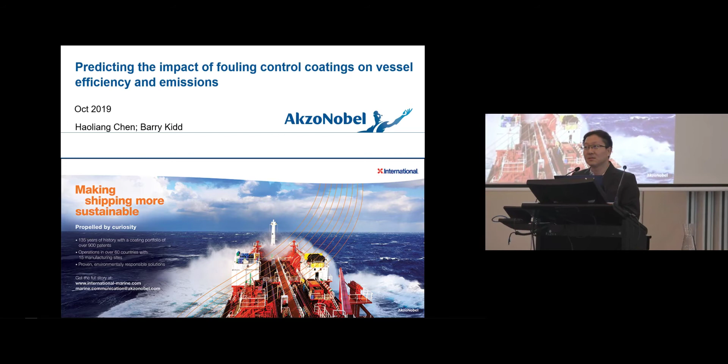I'm talking about the IMO sulfur limit, which will be implemented in less than 3 months. It will start from the 1st of January 2020.

To comply with this regulation, there are two options: either you choose to burn the low sulfur fuel, or you choose to install the scrubber. Neither of them is cheap. Very sensitive, okay - more expensive than me.

Neither of them is cheap, because whatever the initial investment or the long-term operational cost, it will be millions of dollars for an individual vessel. This will urge the ship owner to pursue opportunities to improve their ship efficiency.

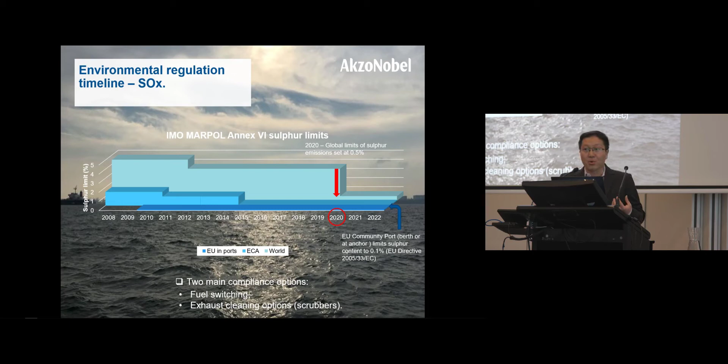So from the engineering point of view, it will make sense for us to look holistically at what will be the potential benefits of different strategies that can be employed to improve vessel efficiency.

Here we take an example recommended by DNV GL. They are talking about improving the bulbous bow, improving main engine or auxiliary engine efficiency, propeller modification, or installing energy saving devices.

Depending on the vessel age and the original design of ship efficiency, and all the changes in coming ship operation - like now more and more ships reduce their speed - there could be good reason, a business case, to review some or all of these options.

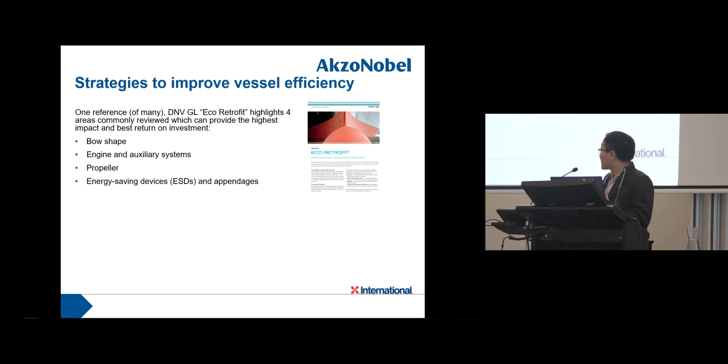But there are other options which have now become popular words in the industry. One is air lubrication, and another is Flettner rotor, which means using the wind to power the ship. Of course, all of these options are valid and may provide benefit in terms of expected efficiency improvement.

However, we cannot overlook or underestimate some other factors - I will explain what we mean - otherwise these factors will negate the potential expected benefit from this improvement.

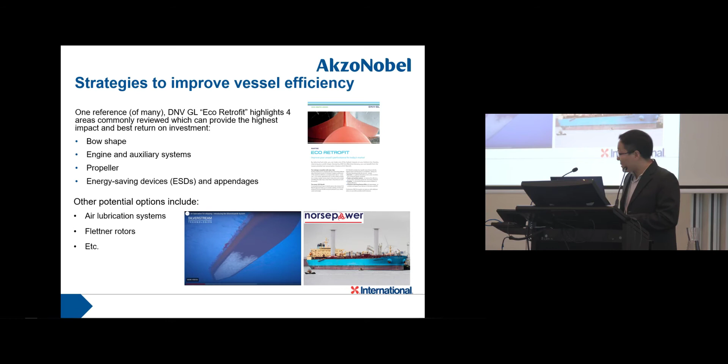So take one step back. We look at some fundamentals. The major resistance when a ship is operated at sea includes frictional resistance and wave-making resistance. The relative importance of these two forces depends on several key factors, like hull form design, ship size, ship type, vessel speed, and hull and propeller condition.

When we talk about ship efficiency, fundamentally we are looking at the delivered power and speed relationship. In fact, for one particular ship, once it is built or out of the dock, the ideal speed and power relationship is fixed.

It's just that over time, as all vessel ship owners know, the speed-power curve will degrade because of change in the hull and propeller condition over time - whatever is the hull damage during port calls, or because of accumulation of biofouling on the surface.

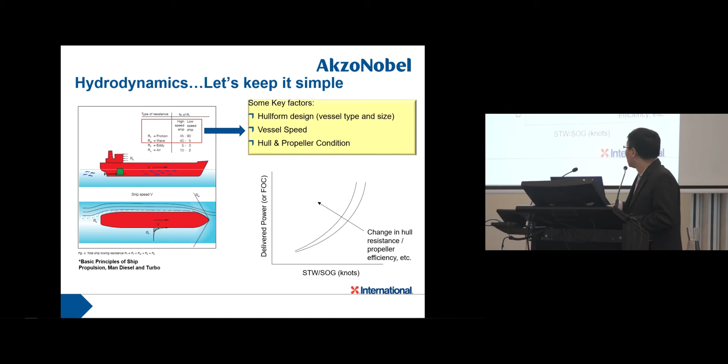Over time, from an engineering point of view, when we talk about ship efficiency and efficiency drop, it basically means to maintain the same speed, we need more power. Or alternatively, if we constantly output the same power, the speed will drop. This causes speed loss. So this is basically what we are talking about regarding ship efficiency.

The important thing is when the operator is planning for the future, how they can position the requirement to manage the condition of the hull and propeller versus other investment decisions, like mentioned in the last slide.

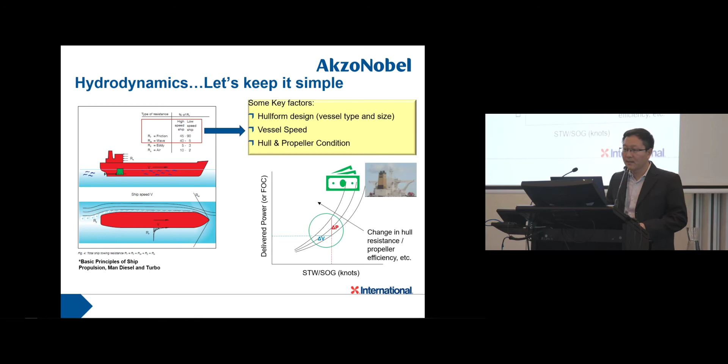Of course, here I'm talking about fouling control. Many vessel operators appreciate the need to control biofouling by application of efficient fouling control coatings, plus hull and propeller cleaning if needed.

The potential range of impact of biofouling growth on vessel efficiency is huge. In general, from soft biofilm to hard barnacle, it will increase the friction resistance. As for the exact number, scientifically we can still debate and need more research to look at this. But in general, this provides some hint of the impact in terms of what we call the power penalty.

On the other hand, we should pay attention to this. It may serve just as a general guidance, because depending on the nature of the biofouling and the extent of fouling growth, this number can significantly change, even for slime and for barnacle. So it doesn't mean a fixed penalty.

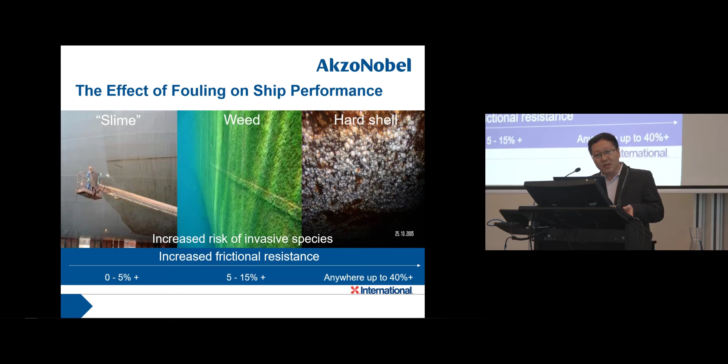At the same time, as easily illustrated in the pictures, from left to right, there's more frictional resistance induced by the fouling growth. It also means increased risk of invasive species.

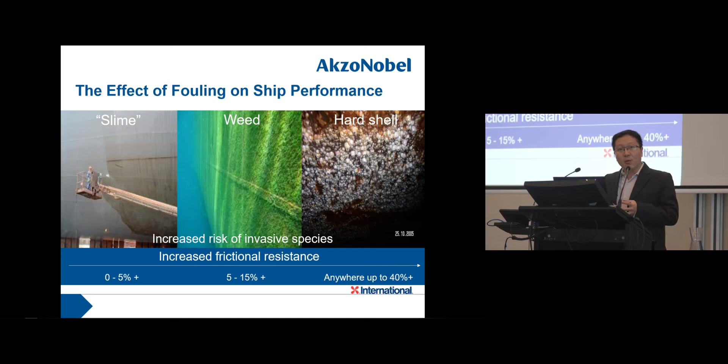So from that perspective, we are consistent in terms of regulation expectation and target, as well as the ship owners' economic incentive. All have the same goal: we want to maintain a smooth and clean hull. The question is, how do we do that?

In AkzoNobel, we definitely need to customize our product offers to our customers to fulfill different needs and consider all these complex factors, as well as the dynamic scenario over this whole time period.

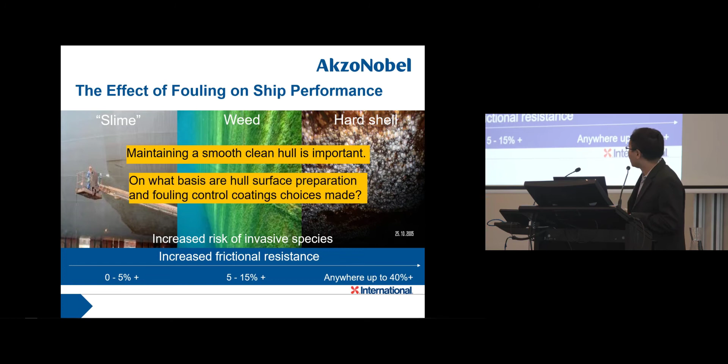So what are the key factors we need to consider when we make the prediction or do the recommendations? These are the list of key factors. In fact, if you recall yesterday's talks about regulation, implementation, and practice, we're basically talking about similar factors, whatever the ship type, size, operational profile, and what coating is used or going to be used.

This means from the regulation body's point of view and from the industrial player's point of view, we have a similar source, and we can achieve a joint goal.

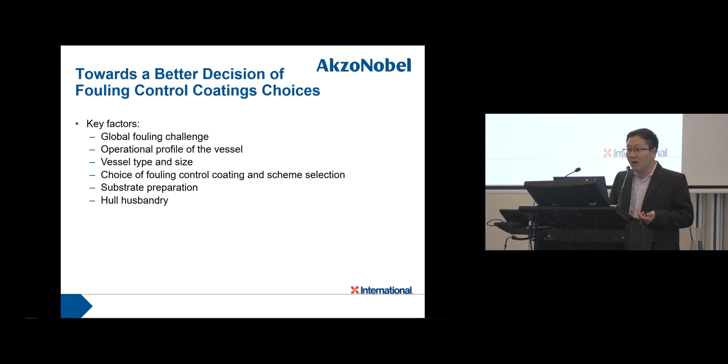One of the challenges in making best use of these factors is whether we have a substantial database. This is always the first step, because without data, we cannot make sound decisions.

Luckily, in AkzoNobel, we have decades of records based on our in-house Dataplan system or event report system. In that system, we record more than 250,000 vessel inspection records over the decades.

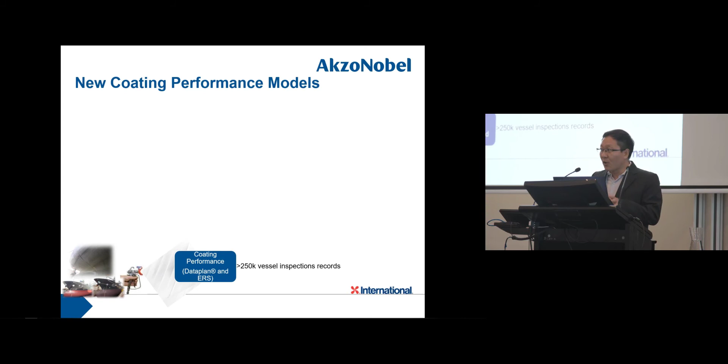At the beginning, we didn't foresee we would have this wonderful use. This database records coating performance in docking and out-docking for hull condition, corrosion, and fouling growth, all together, along with surface preparation information.

With all this information linked with hull surface measurements, done by hundreds of TSRs globally, we can build up the coating performance model, or the hull roughness prediction.

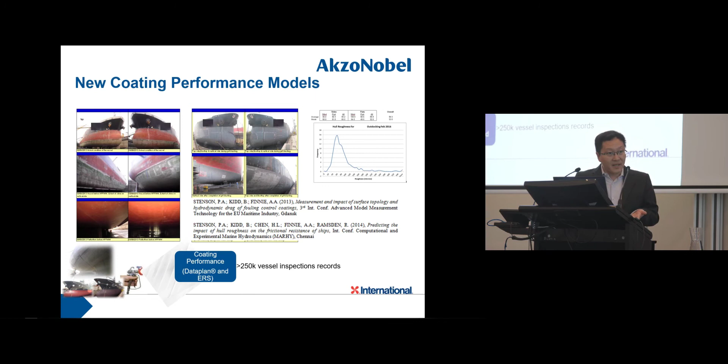At the same time, if we only have this coating performance data, the use is limited if we cannot link it with the operational profile. So we have our in-house tool, called Intertrac, powered by AIS data and the environmental database, which can help us track the ship route, as is now normal. But not only that, we also map it with the fouling challenge.

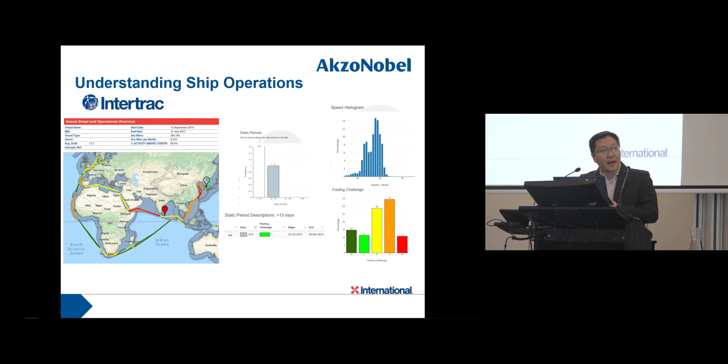For different routes, different seasons, because the ship goes through that particular region and season, they may face different fouling challenges. So we combine them, including the percentage of activity, to come out with a better prediction model of the surface condition, and also convert it based on state-of-the-art research done by our academia colleagues to come out with a prediction model for the hull roughness. Then this hull roughness needs to link with the particular trading route.

Because we have thousands of trading routes and different ships, in order to simplify the work, we group them into aggregated routes. Here we take 9 routes. Of course, it's sometimes a compromise between whether we take more detailed routes or fewer.

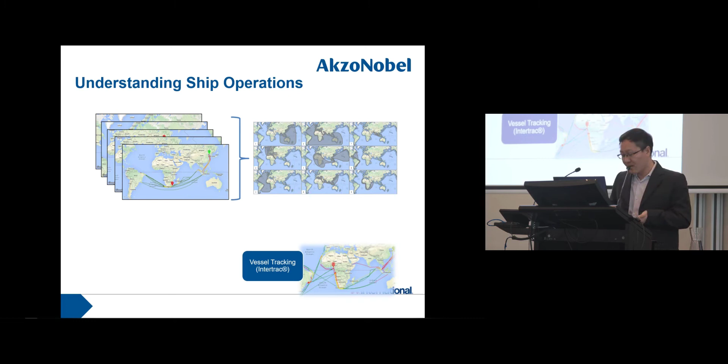The coating performance can be linked with this aggregated trading route, and for some routes it's definitely harder for the coating performance, like coastal warm water, which faces a high challenge. Within this review, we can develop a coating performance model for specific products and specific trading routes, and because we have in-docking, out-docking, and in-service performance data, we can build up the dynamic development curve for fouling growth and how roughness changes.

That's only at the fundamental level. Going forward, moving one level up, for the owner we need to predict the powering and fuel consumption. For this work, based on our prediction of hull roughness, we work with MARIN, one of the famous naval architecture consultants and research institutes in the Netherlands. They help us run the simulation to come out with this.

Confused with the button now.

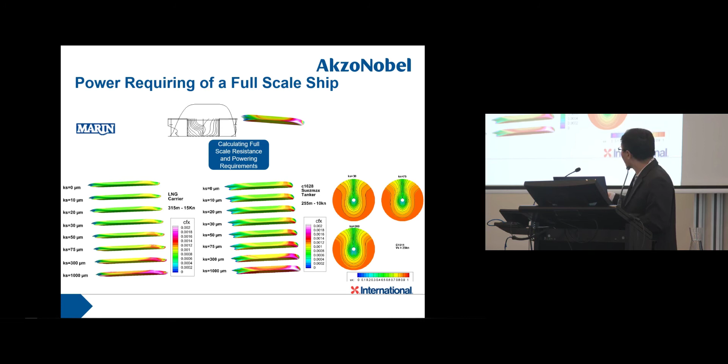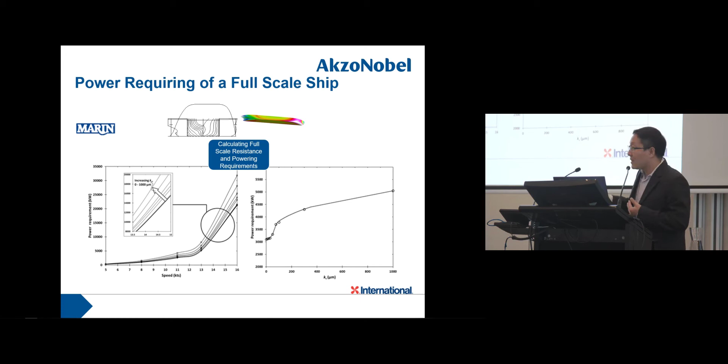They can help us predict the power required for different speeds and different hull roughness levels, which means this will be a unique dynamic condition for this particular scenario. Combined with this, recap the picture: we have the fundamental Intertrac system, performance records, and the link with the full-scale CFD model. We can come out with a prediction tool we call Intertrac Vision.

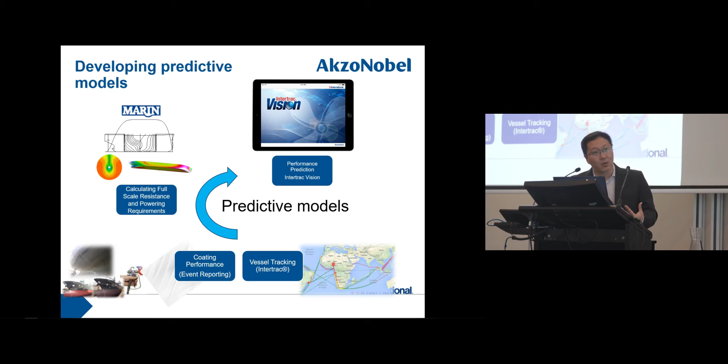This helps us predict the potential benefits for different scenarios and different coating selections. Of course, the natural question is, how do we validate that? So here I take one example: if we take one particular ship, a chemical carrier, this is the ship dimension, and this is the trading route based on customer feedback.

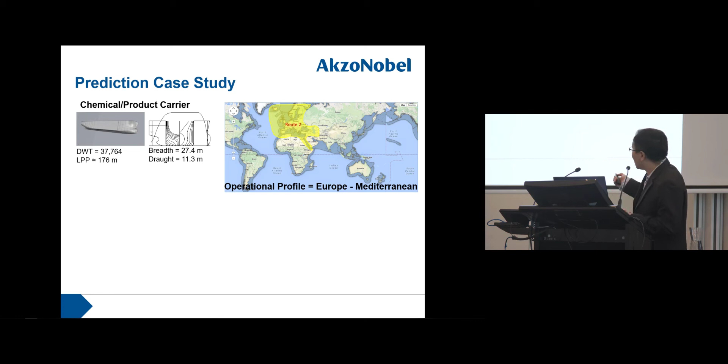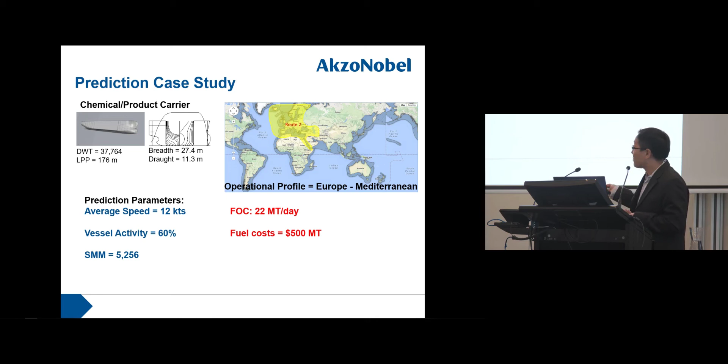This is the expected operational profile, speed and vessel activity, which means the speed is larger than 3 knots most of the time, 60% of the time. The sea miles per month is about 5,000 plus. This is a reference fuel consumption level per day, and also the current fuel cost - current is, I didn't touch.

So this comes out with a prediction for 3 selected products. One is biocide anti-fouling, Ultra Plus Premium. What is the predicted percentage, relative percentage, in terms of over the whole dry-dock cycle?

So link with the speed-power curve. Over time, because there is more fouling accumulation on the hull, to different levels, they will definitely increase the power required. But for different products, they have different performance - that's why, especially towards the end of the dry-dock cycle, the performance is different.

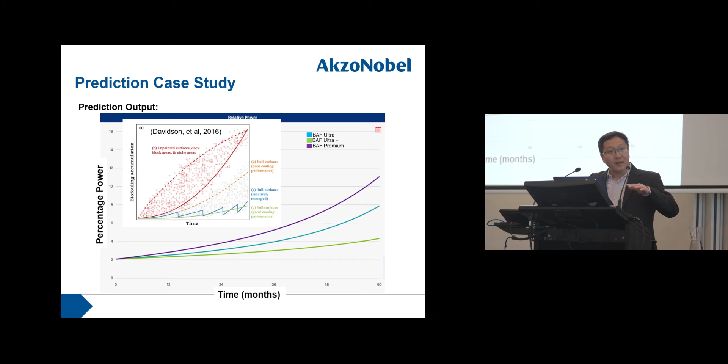In fact, yesterday I just learned from Davidson's presentation - I went back to the hotel and read his paper. It's wonderful, and it goes back similarly to 2016. His paper basically mentioned the good coating performance versus the poor coating performance - this is the difference in performance. In fact, our first version of Intertrac Vision was launched towards the end of 2015. It means, as a community - industry and academia - our understanding of this topic has progressed in parallel, and we can benefit each other.

So come up with the numbers. We can look at the relative benefits for different product selections. If we choose the BAF Premium as a baseline, we can see the BAF Ultra and the Ultra Plus give relative benefits, also environmental benefits in terms of reducing carbon dioxide emissions, because for the Ultra products, you burn less fuel, so you release less carbon dioxide.

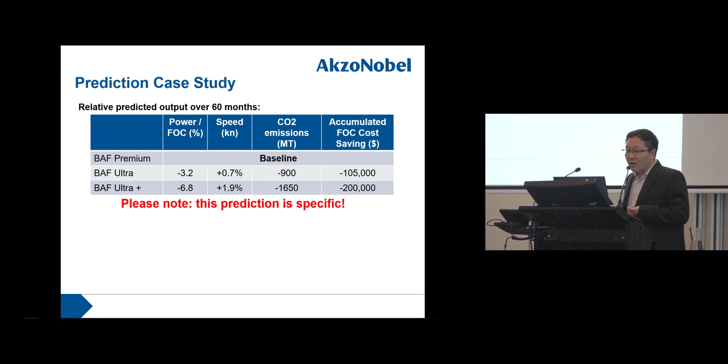Then if we go one step further to look at other options, like during the dry-dock, you can install different energy-saving devices, PBCF or Mewis duct. For each of them individually, in isolation, they can deliver different levels, around 5% of the benefit.

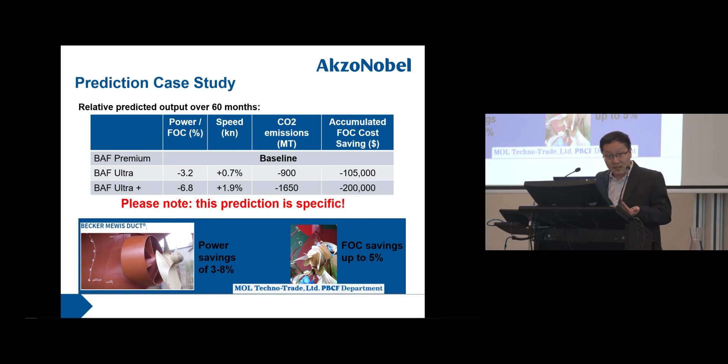However, this is only in isolation. If we look at it as a whole, especially during the dry-dock decision, because of the very tight dry-dock budget, which is the norm in the current shipping industry, if you choose to spend a lot of investment on this part, but at the same time compromise your choice of anti-fouling coatings, going to the lower level, your expected performance delivery may not be achieved. So in that case, we need to balance the dry-dock investment.

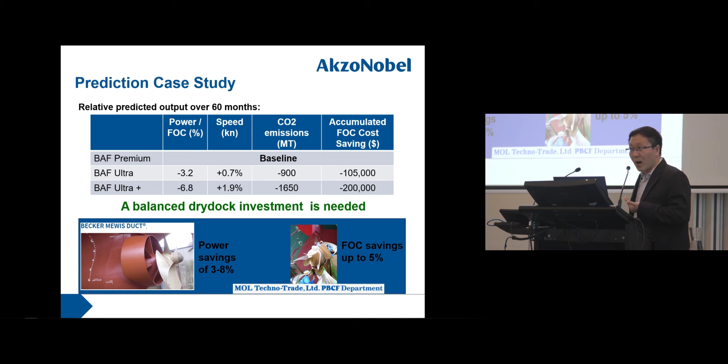At the same time, these energy-saving devices, from the NIS (non-indigenous species) perspective, cannot deliver that benefit. So to fulfill the regulation requirement, they still need to choose better and optimized products to deliver the fouling control requirement. So this is one part.

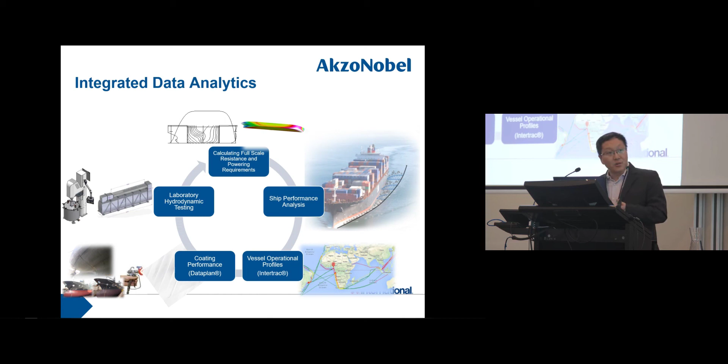And then we come back to the question, how do we validate? Of course, we need real data and real experience to validate our performance prediction. So we choose to do ship performance analysis. This, in fact, is already routine work in AkzoNobel. We put together a holistic picture to assess the prediction against reality, not only vessel performance analysis following the ISO 19030 standard, or using advanced theoretical or empirical formula methods.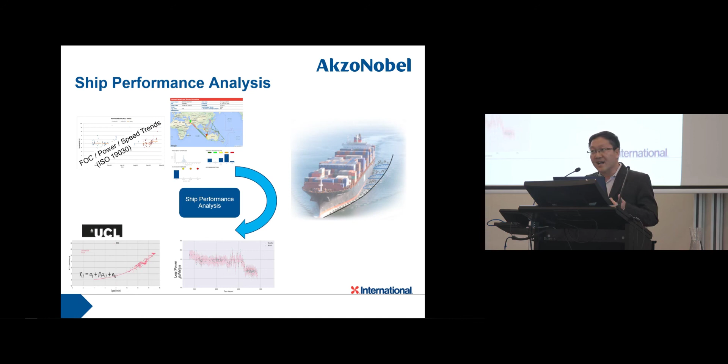We also try to go one step forward. We work with University College London to use machine learning and deep learning to try to do the prediction about upcoming performance, and to help us make preventive actions to meet whatever the economic requirement or even the regulation requirement.

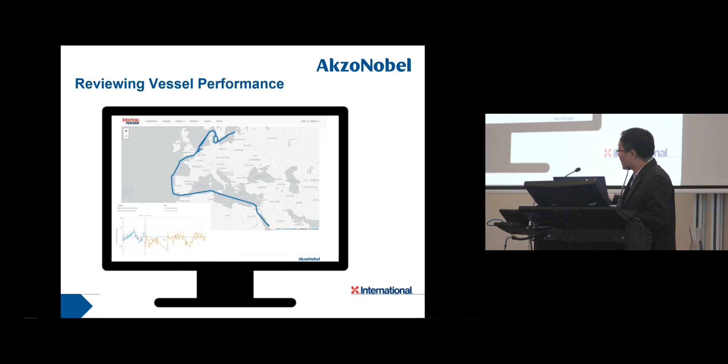So then, of course, to release manpower, since in any business organization it's tight, to reduce our manual workload, we developed this online vessel performance AI tool, powered by UCL's model. It will be ready to connect to the customer in the next 2 months. This will release our time to focus on deeper understanding about hull performance and better tools development.

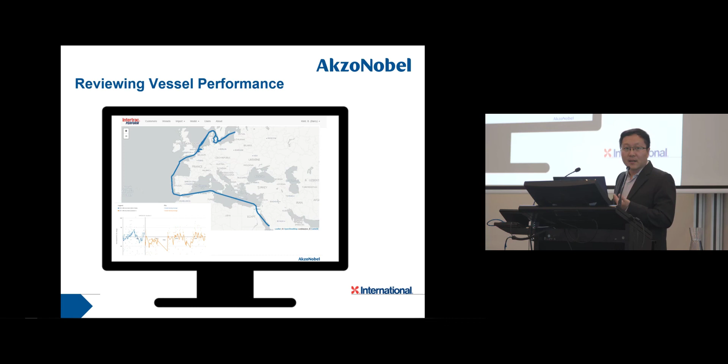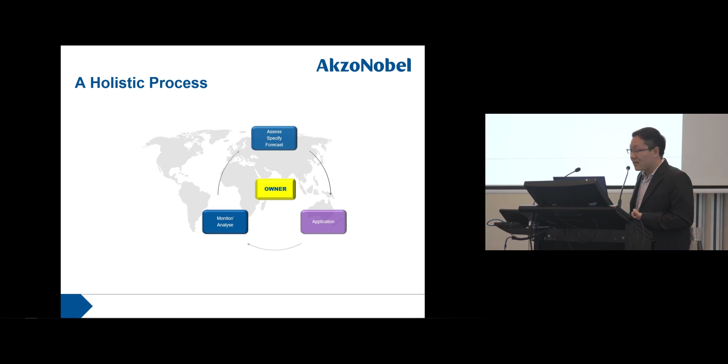So as a summary, taking a holistic view, in terms of whatever the ship owner or the regulation body, what can we do to review and manage this biofouling problem? We start from the assessment, forecast, and also look at the application side, and hopefully, it's the trend, we need to do monitoring and analysis.

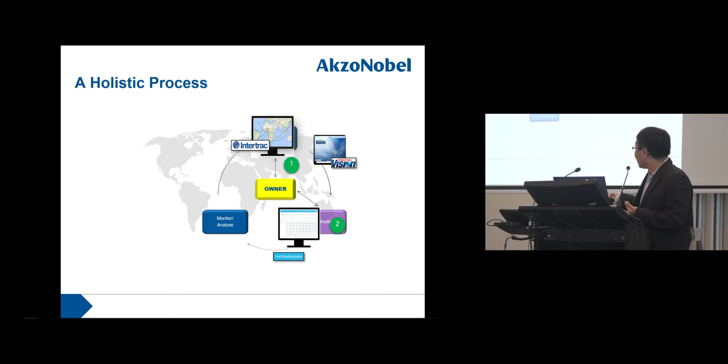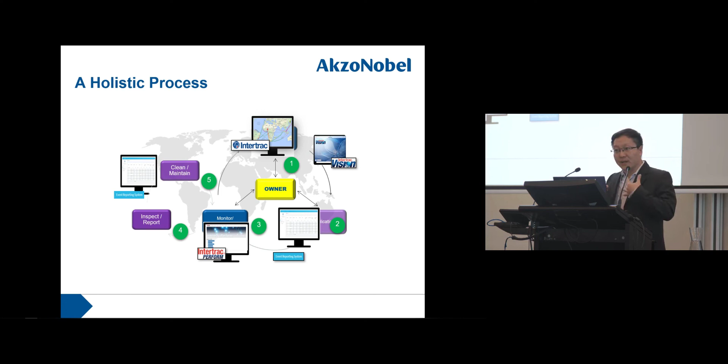So in terms of the assessment, we have Intertrac. We can do the link with Intertrac. We can do future forecasting with Intertrac Vision, and then on the application side, we have the event reporting system to further track and record all the historical information. For monitoring and analysis, we have Intertrac Perform linked with other inspection reports and hull cleaning and maintenance reports. All this together, jointly, we can come to a holistic review about the potential risks and the management plan.

So as a summary, choosing and correctly applying the optimal fouling control coatings can give several benefits, not only economic benefits, but also minimizing the risk of invasive species. It is also very important for us to choose the right coating for the right ship, considering all the dynamic and specific scenarios. There are many factors to consider, and it needs a lot of database. So this is what we can help the industry with.

So at the end, better prediction and management of hull and propeller condition should be a holistic process, and we need to review different pieces of information together. Thank you.